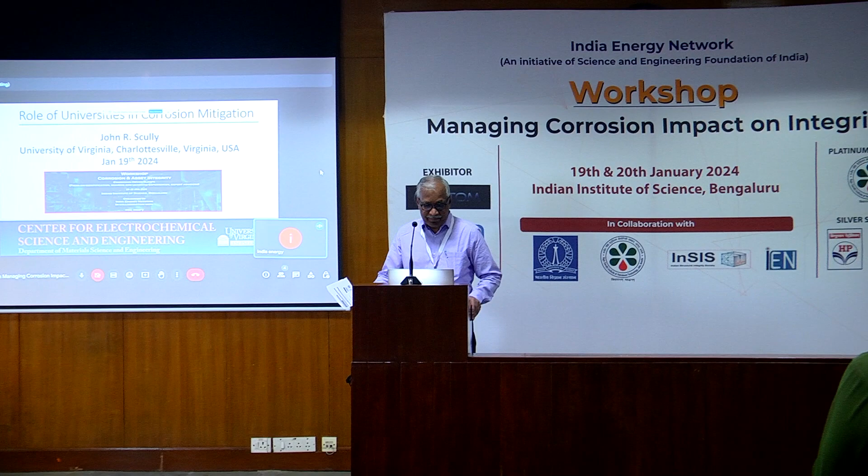I want to very briefly say only two sentences about Professor John Scully, and those who are in the corrosion field, he doesn't need an introduction. I would like to say that he is a world leader in corrosion science and engineering, working on very broad topics, all of them in depth. And he is also the chief editor of Corrosion Journal. Earlier it was called NACE International, now it's called AMPP, which is a very renowned journal in the area of corrosion. And with this brief introduction, John, it's your time. It's about 30 minutes. If you can give about 5 minutes for questions, it'd be wonderful. Thank you very much.

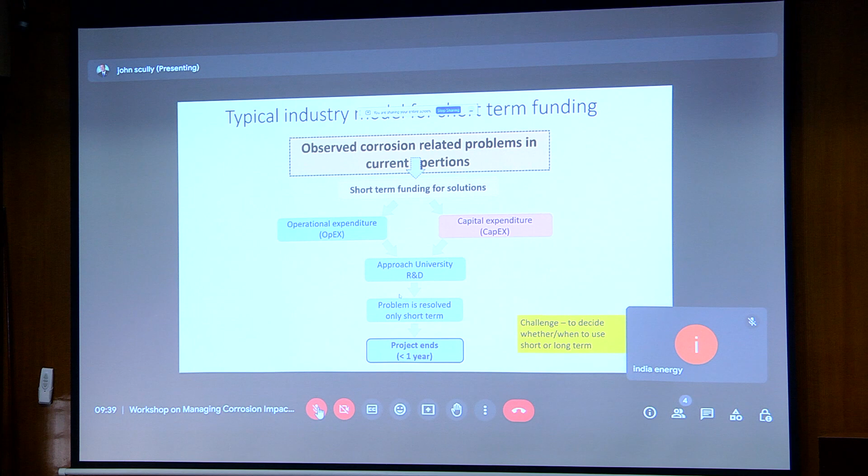And so that brings us to the long term. The long term has some differences, though, as industry tells me, because that's either observed or maybe even anticipated corrosion. For instance, they might go into a new harsh environment, or be using new materials or a new process, some change in chemistry, say it's a chemical process industry, and there's some change in operating temperature or operating chemistry. And so it might actually be an anticipated corrosion problem in a future operation. It might be an observation of some sort of long-standing issue. And so there's long-term funding.

They know it might take more than 1 year to provide a solution, more than a few months. Our typical PhD after a master's degree is 3 or 4 years at Virginia. So it's pretty long, but only about the first year has to be dedicated to classes. We give a fair number of classes in the U.S. in graduate research. Typical materials science departments require 8 classes for a PhD. So that first year they don't get much research done, but then it's 3 good years of research.

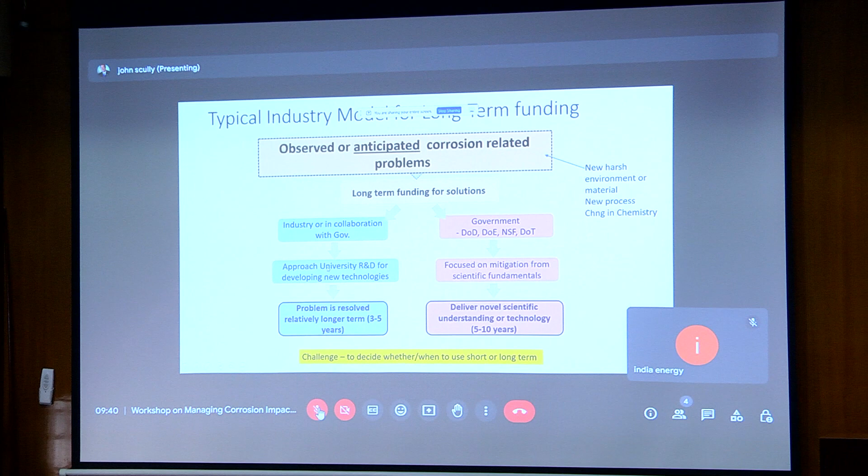And so you see there the blue path and the pink path, and one is what government does. Pardon me for the acronyms, but DOE is Department of Energy, Department of Defense, DOD, National Science Foundation, and Department of Transportation. And often they're a customer. They maintain some equipment like the infrastructure, or like the Navy, they're responsible for maintaining equipment assets, let's say, and they might need to deliver novel scientific understanding or technology. For instance, if it's a new alloy or new material, or new aircraft, or even some mandate like elimination of chromate, they might have a 5 or 10 year study, and it's long term. Usually never runs more than about 7 or 10 years.

We have had some long collaborations with industry, and we can talk about that. I'll give you an example coming up next in the slide deck. But the problem can be resolved typically in, say, 3 to 5 years, or at least that's what you're shooting for. We staff that in various ways at UVA. It doesn't mean it has to be staffed for the duration of the PhD. We have different approaches, combinations of postdocs and PhDs and master's students and even undergraduates, that we put the orchestra or band together to solve the problem. So the challenge is kind of here to decide where the money comes from, and everybody's got a problem, right?

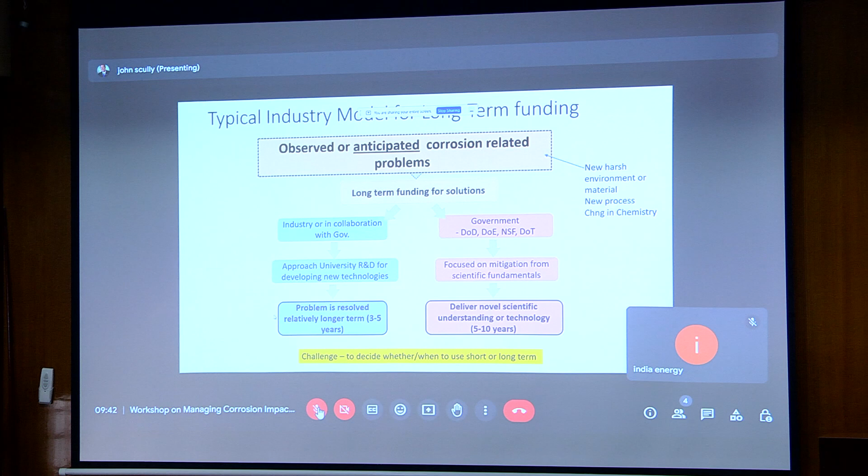It's a matter of which percolates to the top and deciding whether to use short or long-term funding. What's an example of that? I'd like to give a broader example. And the first industry-university example I'll give is actually not what you think of in corrosion all the time, but it's Rolls-Royce, because it's a very impressive approach. It's the Rolls-Royce University Technology Center, so UTC.

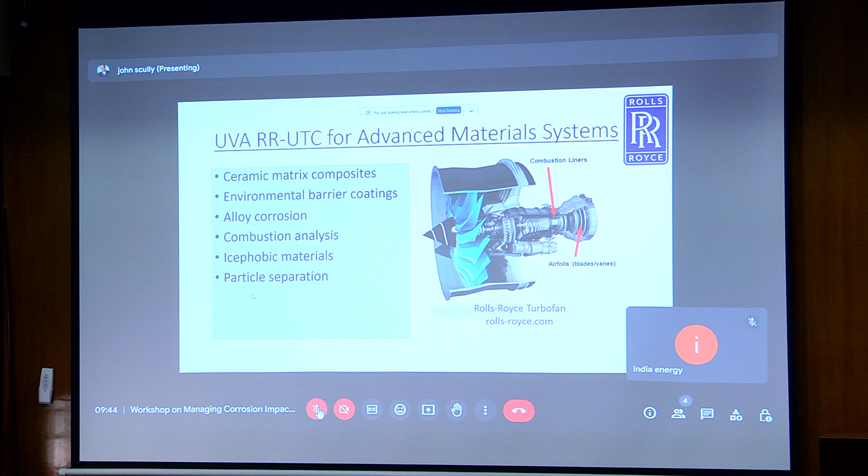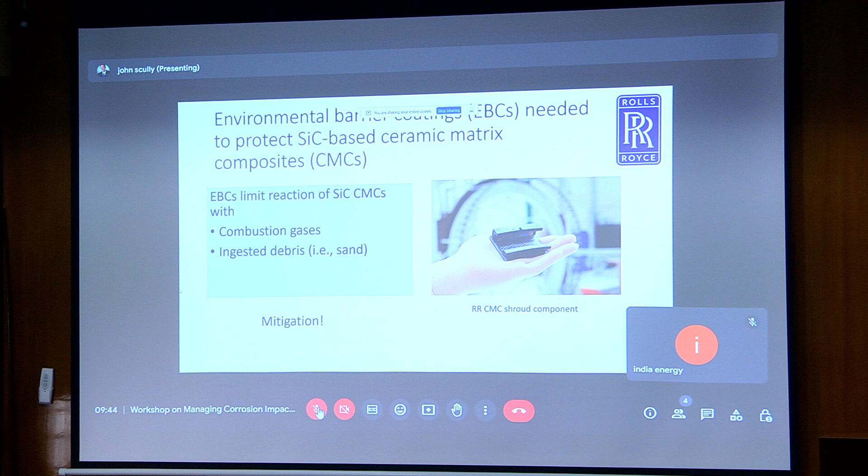So a good project at UVA, to give an example, is that environmental barrier coatings were needed to protect silicon carbide-based ceramic matrix composites that are used in engine components. The EBCs limit the reaction of the silicon carbide with combustion gases and ingested debris, like the sand I was talking about. So it is a coating for mitigation, but not one we think about in aqueous corrosion very much.

So what are the benefits? Who gets what? The universities get sponsored research funding that supports the faculty and the students. We pay our graduate students a stipend, a research assistantship, and pay for their health insurance. Student development, student internships with Rolls-Royce. So the companies get the interns, they get to try before they buy and see which student they like the most. Publications and patents, required for professors' tenure, as you know.

The industry benefits too: access to the technological experts, access to state-of-the-art research tools, workforce development, and patents. So what's an example of government-university collaboration? One of the biggest in the United States over the last 10 years, winding down after about 12 years in its last year, is the Technical Corrosion Collaboration, or TCC. It's something the Office of the Under Secretary of Defense ran, and they looked at corrosion problems. There are a lot of words there, but there are 2 objectives I can summarize pretty briefly.

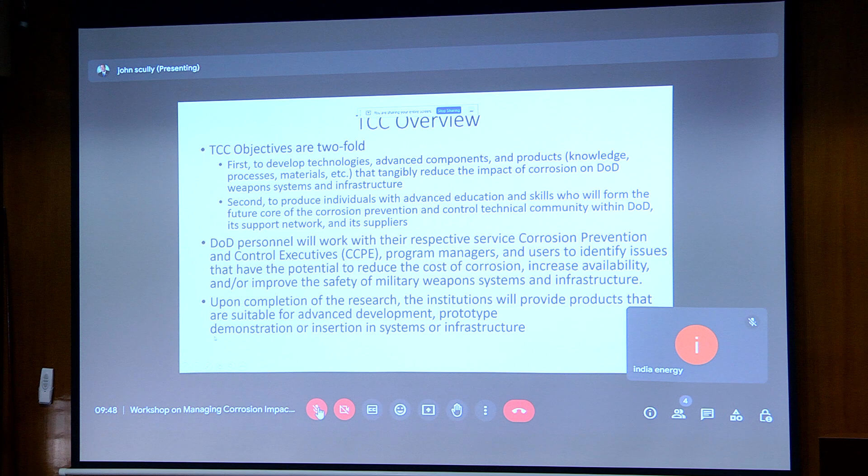So the DoD personnel work very closely. The difference here is that you don't give the university the money and say goodbye, I'll see you when it's finished. There's close collaboration, often with colleagues in a DoD laboratory side by side. The university student is working with someone in a DoD laboratory, might intern there or spend a summer there. And then upon completion of the research, the institution provides a product or a test procedure, whatever they need.

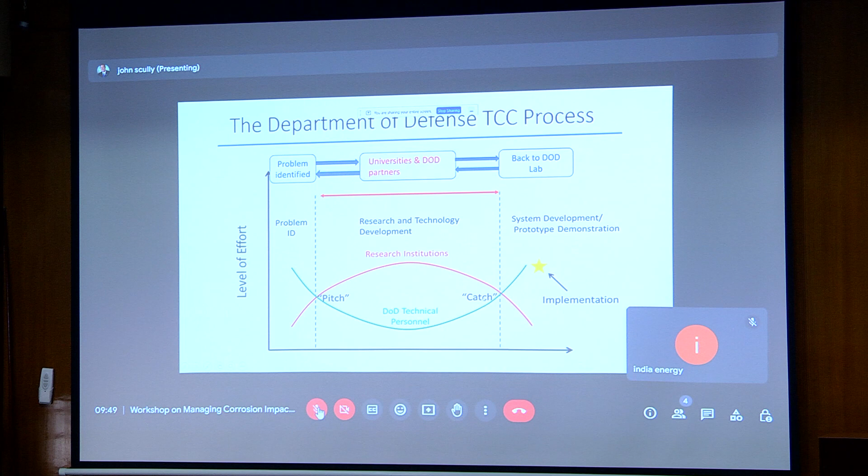And so then the research institution takes over. That's during the period of the grant, let's say, and the research and technology takes over. But the DoD personnel, like I said, don't disappear. They just play the secondary role where the research institution plays the primary role. Then over on the right, what you see is the flip-flop occurs, the inversion occurs. The DoD personnel sort of catch the pitch, and they implement it. And then the role of the research institution doesn't disappear, but it goes down, and the situation goes back to DoD.

So I won't read you this long list, and time's getting short, so I need to go through this quickly. So an example of that, a big thing, is accelerated testing. Everybody's interested in accelerated testing, always has been. It's a vexing problem. How do we accurately simulate atmospheric corrosion, for instance, for aircraft in the field? And then how do you do a life accelerated test that mimics what you have in the field or accelerates the same mechanism, but in shorter term than a 5 or 10 year exposure in the field? And so that's a vexing problem.

As you know, ASTM B117 is notorious for not matching the field exposures. The samples that come out corroded don't look anything like each other, right? So there's a lot of outputs there. You can see I've got them listed. You'll have these slides. I won't read those all.

Another one is a classic one: robust substrate protection for lightweight alloys, i.e. chromate replacement. And the question is, how does chromate work for corrosion mitigation? What single or combined strategy can provide equivalent protection? And that's a mouthful, because there may not be one drop-in substitute, as you know.

And then one of the things that our DoD was really interested in, especially since they are worldwide, is are there environments where the mitigation inhibitor doesn't work or the pre-treatment doesn't work? So as well as the good story, they want to know the bad story, like where does it not work? Do you get into a desert or some dry situation or some very wet jungle situation where it doesn't work? And so those are two classic problems.

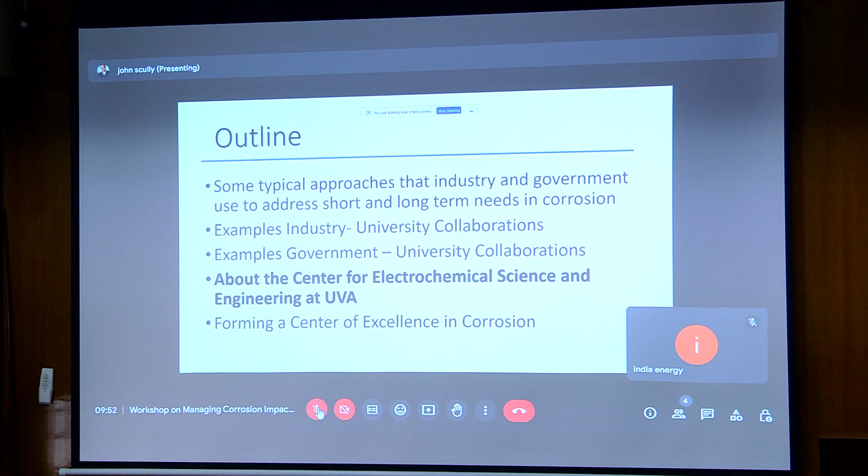So the last one: now that you got this introduction of the way some people do it, as far as industry and government, what about centers that try to do this? And how would you form a center of excellence? I'll tell you, in the closing minutes, about how we formed our center, which has been around for a while.

And so now, the Center for Electrochemical Science and Engineering at UVA is co-directed by my colleague Rob Kelly and myself. And we've been the directors since the 1990s. The center is one of the premier centers. It's not always been corrosion, it's always been electrochemistry and materials.

You can understand there's a lot of interest in batteries and recycling now, and we have a hiring for a faculty position, and I'm not sure that faculty member will look like Rob Kelly and John Scully. I don't mean as far as how ugly we are, but I mean as far as the mix of things that they do might be different in the new faculty member. It's someone that can work in harsh environments or in harsh situations. Harsh has lots of meanings to lots of people.

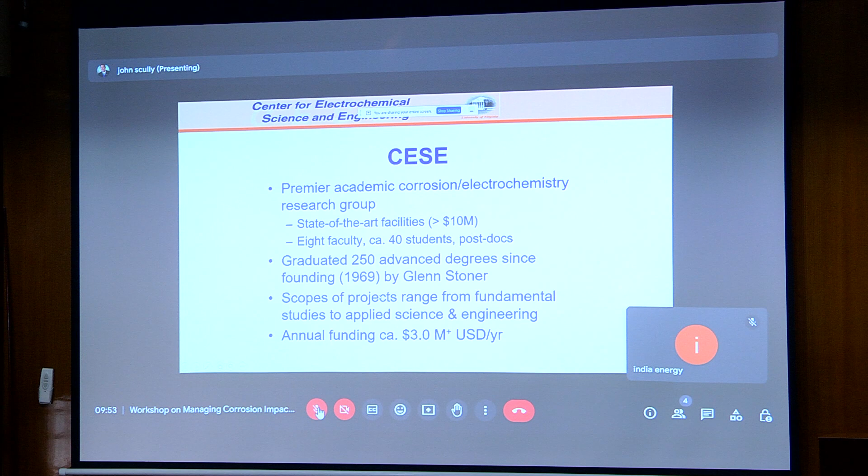So we've graduated over 250 advanced degrees since its founding in 1969 by Glenn Stoner, and we're proud of our graduates. They're all over the place, the DoD labs, the DOE labs. We have over 10 professors at universities that teach corrosion. And the scope of the projects range from fundamental studies to applied science and engineering, but also consulting. 8 faculty members are affiliated with it.

That actually cuts across, I should mention, a couple of departments. So our center is housed in the material science department, but it's actually in several departments. And Gary Koenig is in chemical engineering, for instance. So our center kind of cuts across the department silo structure that you have.

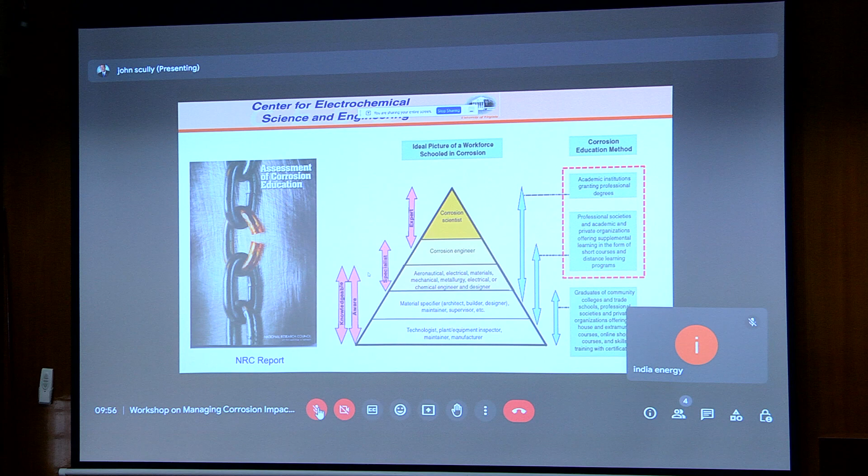And now it's a part of the Material Science Department at University of Manchester. UMIST is University of Manchester Institute for Science and Technology. So it's actually stayed within the department, but gone from chemical engineering to material science engineering. So the usual structure is that it comes out of the engineering school.

The thing there, what does it take? It takes an industry or government sponsored chair professorship. Like you have to prime the pump, so to speak. It takes somebody to come up from industry or government and convince the dean of engineering to fund a faculty position, and money helps, right? And so in the industry, we've done it several times by having an industry or government partner that will support faculty for 1 or 2 years, and then the dean will take it over, and the School of Engineering will take care of it.

So our faculty are on 9 months appointment. That means 9 months are paid for teaching, 3 months for research. And so we can sustain that in that kind of formula. And then, of course, the high-performing faculty carry their own weight within the university. So the high-performing faculty can go to the dean and argue for a position.